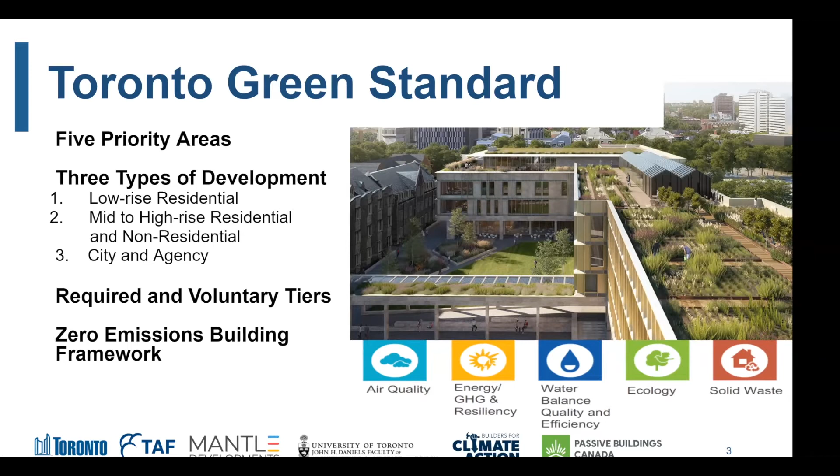The TGS includes required and voluntary tiers, and I'll explain something called our zero emissions building framework.

In 2017, 2018, we published something called our zero emissions building framework. The City of Vancouver has something similar called their zero emissions plan. What it does is set out long-term targets for the energy efficiency and emissions performance of our large Part 3 buildings, and originally that framework was set out to 2030, where we would require very low emissions level buildings.

Recently in December, our City Council bumped up that timeframe. They advanced it, asking us as part of our climate action plan to move our buildings requirements forward sooner in order to achieve what we call net zero 2040 for our citywide objectives on climate change. So instead of by 2030, by 2028 we will be requiring the highest levels of performance through our Toronto Green Standard.

So far we've been very focused on operational emissions in buildings, but now with this new emerging issue that we're all going to be talking about today, a very important issue, we have to really look at the materials components, those upfront emissions as well, and work that into our standards and process.

What we've done with the Toronto Green Standard coming into effect shortly, this Sunday, version 4, is we've introduced in a voluntary way tracking of upfront embodied emissions in building materials for both the Part 9 or Part 3 buildings. It's introduced as voluntary, but through these studies we're looking at how we might advance it as part of this framework over time to 2028.

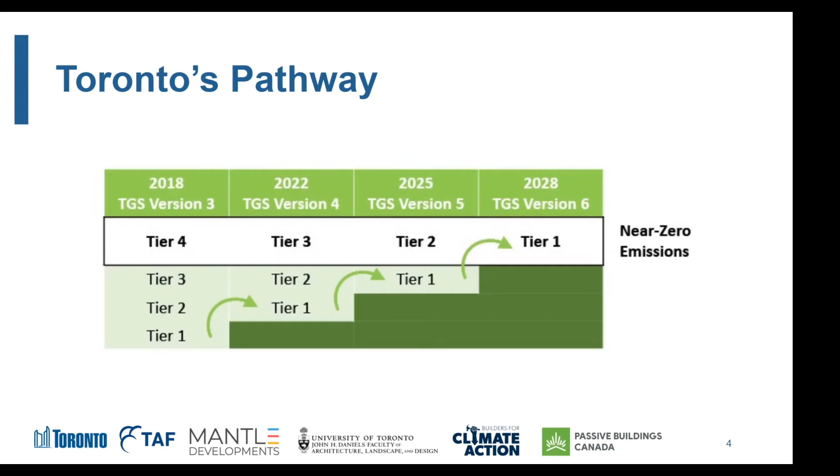This is where your input and your involvement, because you're really key stakeholders in making this happen, is very important.

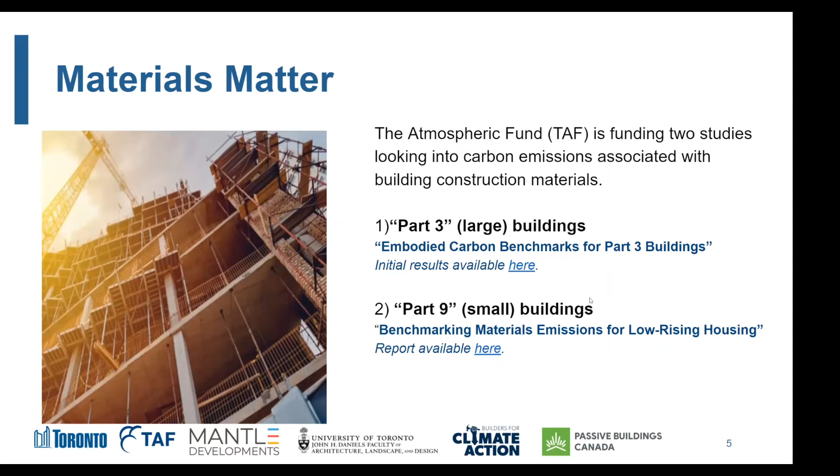As we mentioned, there are two studies going on. You'll be hearing about both of them briefly today, an update on those. What we're really looking for today is any kind of input that will inform our final deliverable on the Part 3 study. The Part 9 study has been released, but the Part 3 building study will be finished by July, producing a policy primer to the City of Toronto, making recommendations on how we manage this issue even better over time. So looking forward to your input. We may be changing the Toronto Green Standard requirements in 2025 depending on those recommendations, and may include a target coming from this study. Just to give you that context.

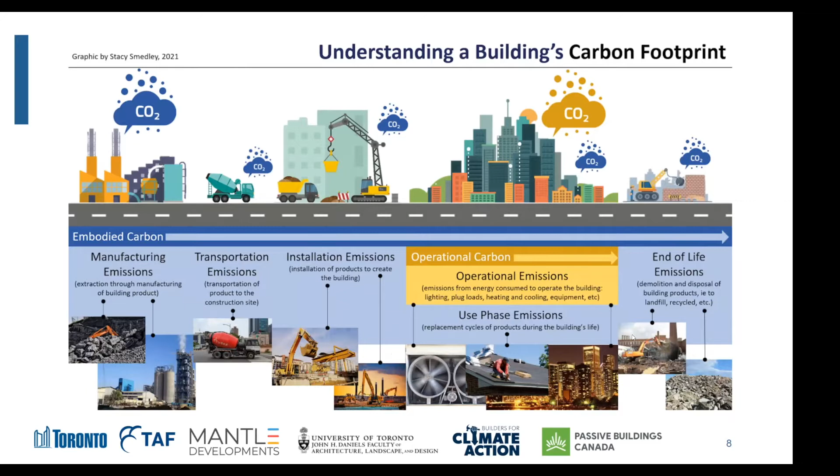Clearly, all of those processes have carbon emissions associated with them, but none of them are currently included or managed when we're talking about energy efficiency requirements or even operational carbon requirements on building annual operations.

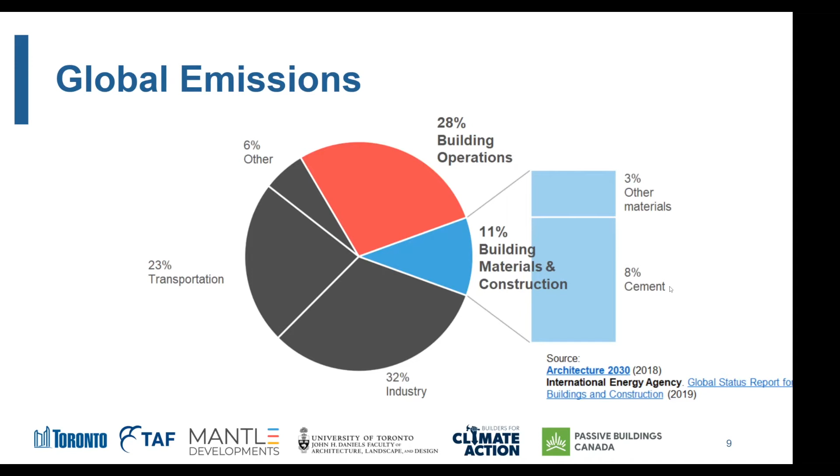But the good news is there's a lot of easy things we can do to reduce those numbers, a lot of low-hanging fruit, because these metrics haven't really been optimized until very recently. That's what this study is all about - not totally changing how manufacturers are working, but finding those easy wins and low-hanging fruit to drive down this number and start managing these embodied emissions more actively.

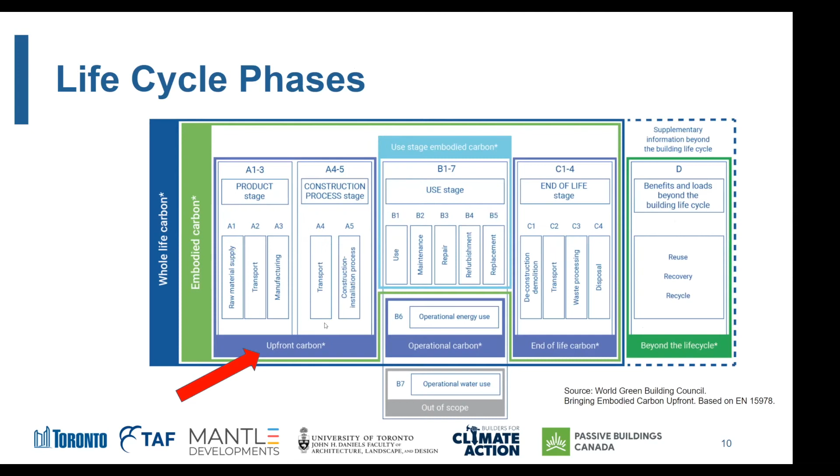We call A1 to A5 upfront carbon - this is everything that happens before the building is occupied, and this is really where we're seeing the majority of emissions in the built environment. I like to show this graphic because it shows why this is becoming such an important issue and why it's increasingly important on policymakers' agendas.

But this is really no longer the case for new construction, and there's two reasons for that. One is buildings are much more energy efficient than they used to be, because of things like the Toronto Green Standard and the Ontario Building Code.

The second reason is our energy system is much lower carbon than it used to be. Things like coal phase-out of our electricity grid, PV panels, solar panels being installed, and wind turbines being installed throughout the province have all made a unit of energy much lower carbon.

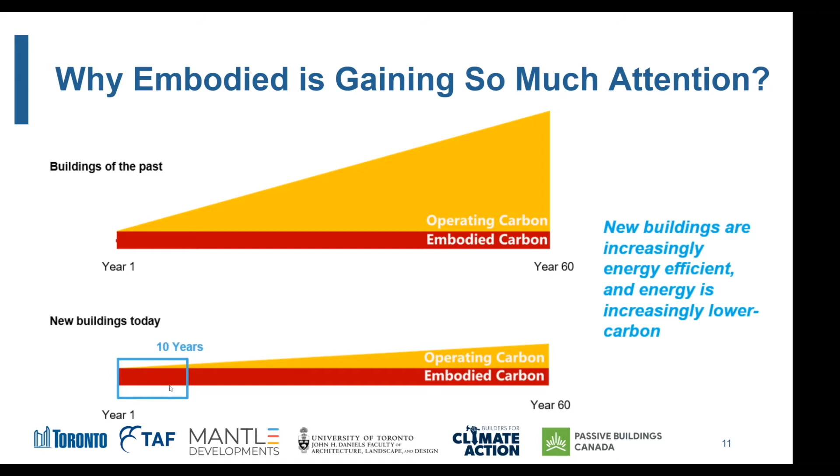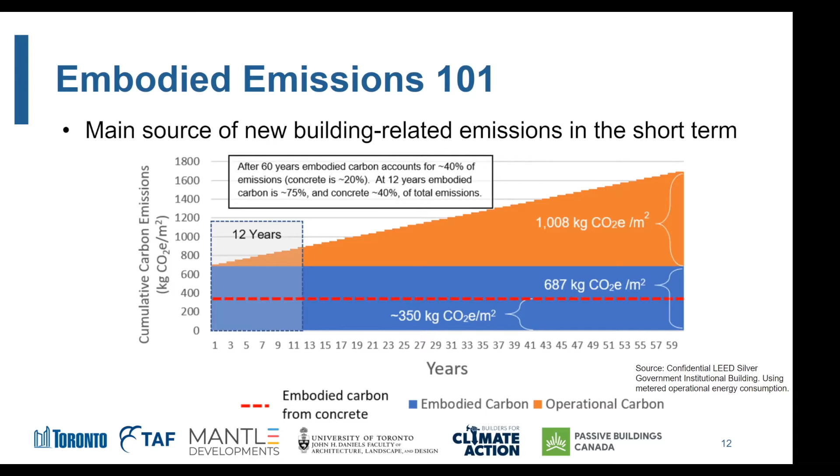So there's, as I said, a lot of low-hanging fruit. We really can pull this down quite significantly by making a few key design changes, which my colleagues will talk about later in the presentation.

So one of the first steps to address this issue is that manufacturers can start producing and providing something called an Environmental Product Declaration, or EPD. I like to describe this as basically a nutritional label, but for construction materials. It's really a disclosure document. It helps show what the environmental impact of a product is, including all of its life cycle phases from extraction to manufacture. Some EPDs can also include future phases like use and end of life, but not all of them.

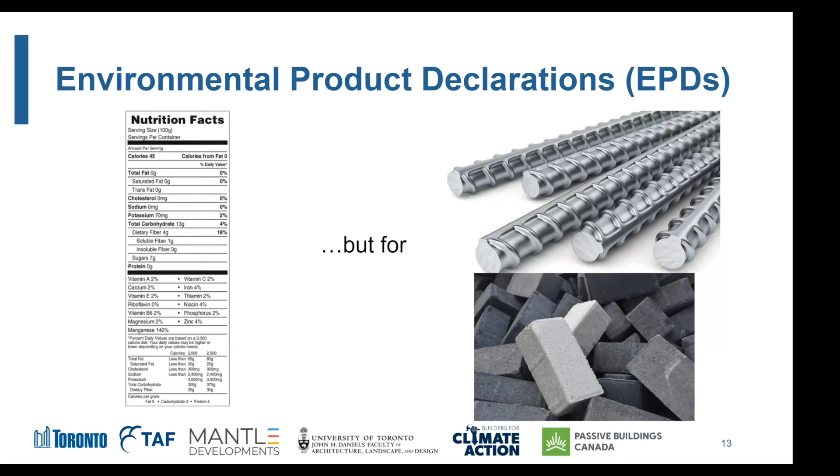On EPDs, I would say let's focus on the global warming potential, or GWP, which is the term for the carbon impact, the embodied carbon in the product.

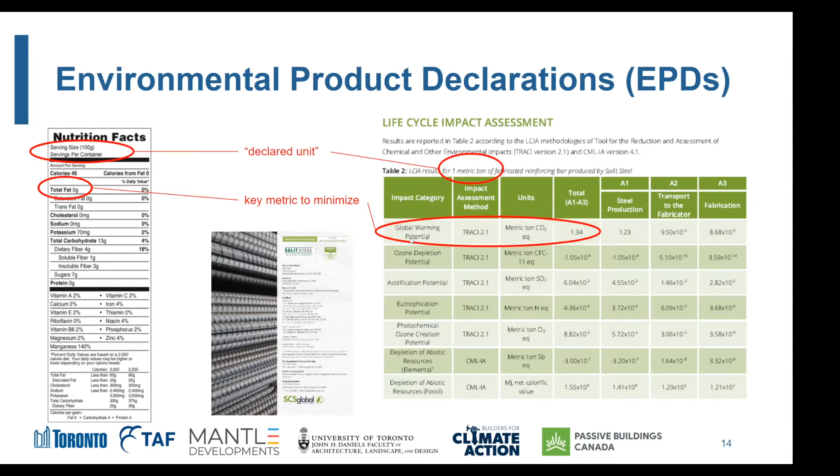But if I'm trying to calculate the carbon impact on one specific building on one of Lisa's City of Toronto projects, those industry average numbers aren't as great as I would love to see, because what I really want to know is the impact of the concrete that we're ordering on this project from the plant down the street. If we're looking at industry average EPDs, they don't quite give us that data.

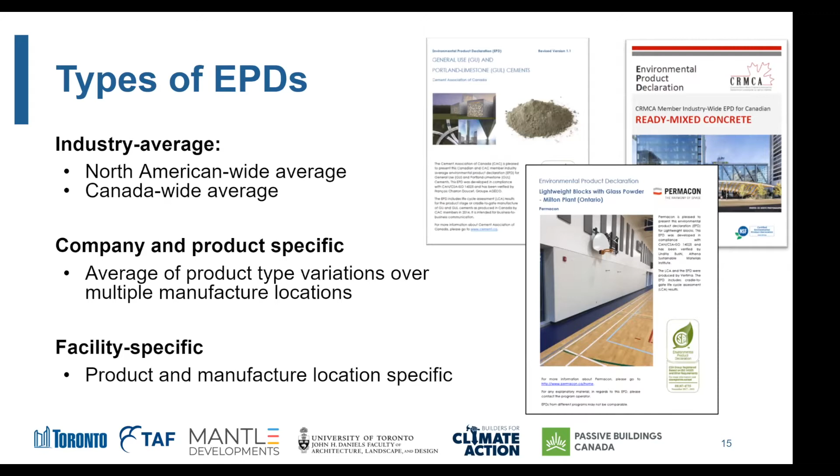Edmonton has also passed a similar requirement. The federal government has their own set of embodied carbon requirements coming into place. It needs to be disclosed for major structural materials this year. As of 2025, they're targeting a 30% reduction in embodied carbon in structural materials. And the City of Vancouver has a 40% reduction target that they're rolling out over the next few years.

Also, Waterfront Toronto has its own specific requirements that require the reporting of embodied carbon. Just to quickly say, there's a whole list of state and federal initiatives in the US, a lot of this under the term Buy Clean. You might see that in some news articles. Buy Clean is all about procurement having lower carbon materials that they're purchasing.

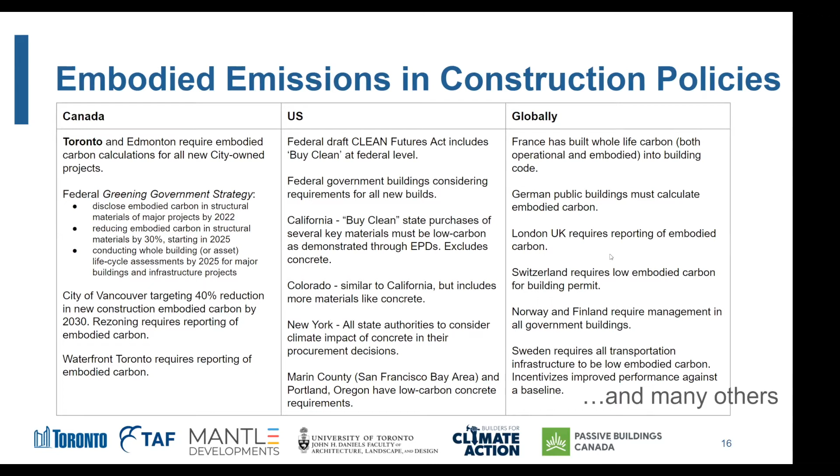So anyone who's interested to learn more about these policies, I'd recommend you reach out to me, I'd be happy to chat about any of these. But we're going to keep moving on here because I want to save time for the other speakers and discussion.

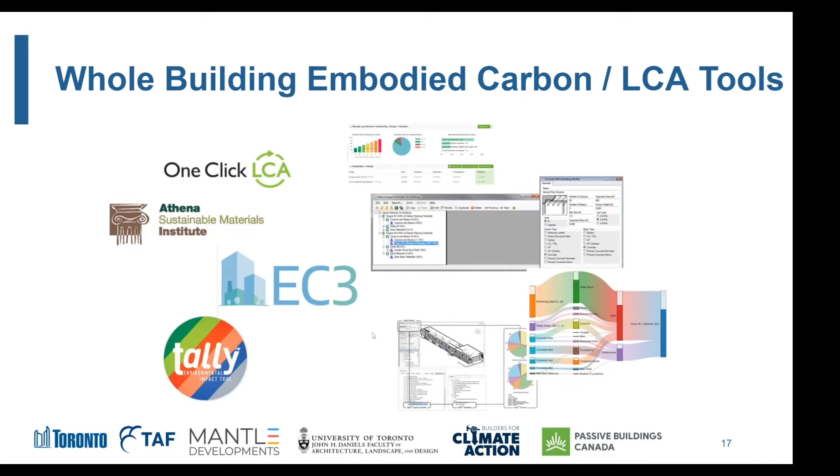Just to say, I know it's a big topic we're talking about here, but there are some really great tools that can be used to help calculate these numbers for us. On the screen, we have a bunch of them. Some of these are free to use, Canadian-based, and other ones have different functionality and can work with BIM models, or some are automated with material processes. So there's a whole range of tools we can use to help streamline this process. I'll just quickly comment that we can do these assessments at multiple times throughout a building design.

The idea isn't to do one LCA at one point of the project and then it's done, because there's really different solutions we can uncover if we do these assessments at different parts throughout the project. We're going to share these slides probably next week, but won't go into all of this in detail.

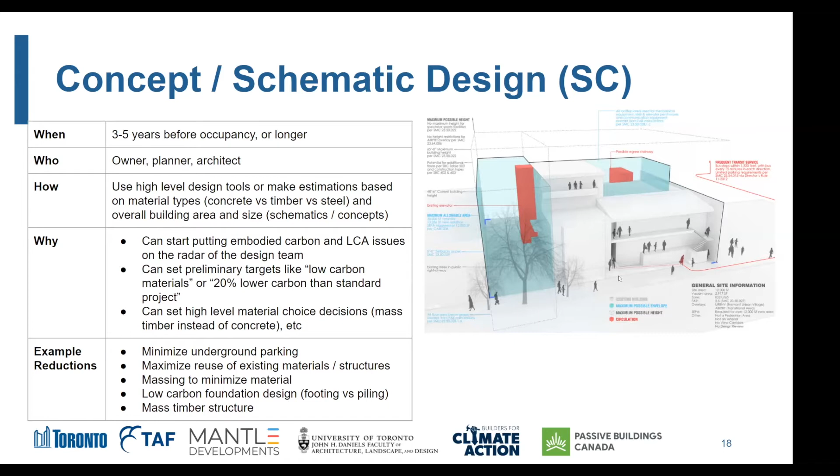Just to say, at concept design we can have a high level understanding of material type, so concrete versus steel versus mass timber, for example. At detailed design, we can have a more finer grain idea of different layout decisions, or the number of partitions we're using, and things like that we can optimize.

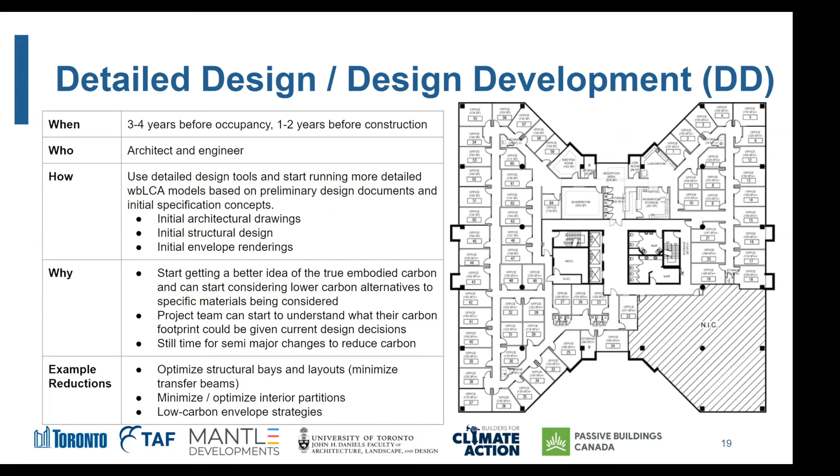If we were to use this at the procurement, tender, and construction phase, this is where we can get into more specifics about the specific material properties, so the amount of recycled content in a given material, or the location of a specific supplier. Ordering from down the street or shipping it in from China, right? Those are going to have very different carbon impacts.

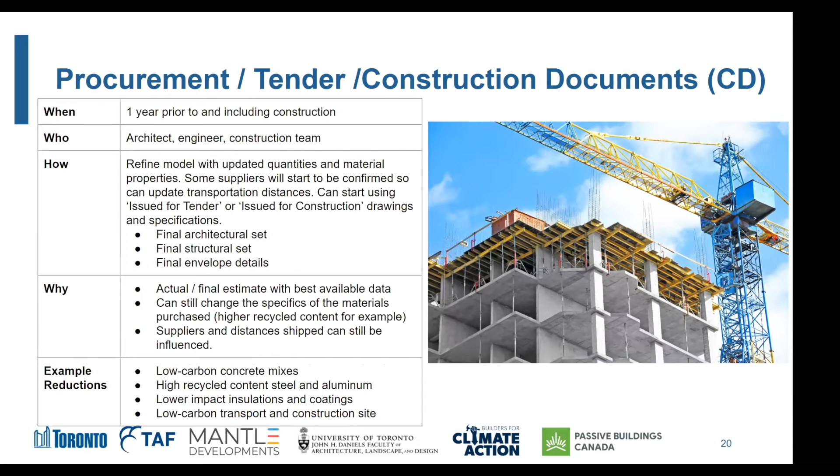So these are the kinds of things we can discover throughout the different life cycle or throughout the different design phases. And then finally, we could even do an LCA post-construction at use or occupancy, which obviously we don't really have an opportunity to make changes anymore, but this is really the final number that we know, because as you all know, there's lots of change orders that happen during construction. So we can use this as our final number and have lessons learned for future projects going forward.

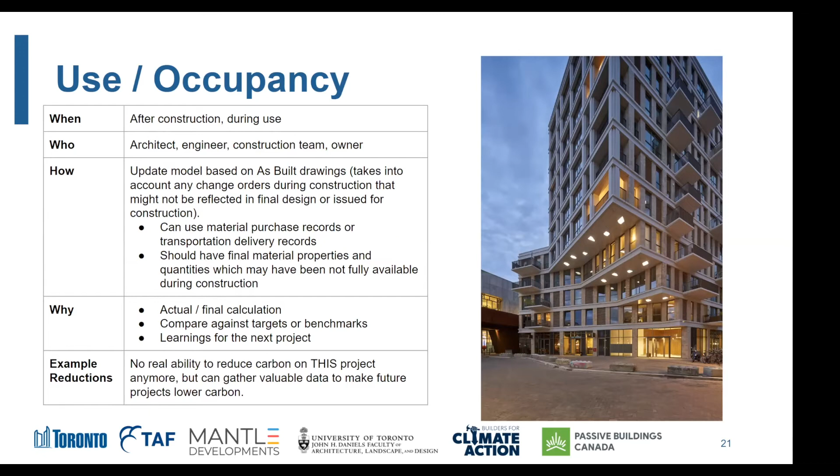Just very quickly to touch on some best practices in reducing embodied carbon. The first thing is just to ask suppliers. I guess you guys are the suppliers, but when I'm talking to owners and designers, I say ask your suppliers, is there a lower carbon option? Because a lot of you guys and girls do have lower carbon options, but the market needs to demand it.

We also found that super tall buildings have a higher carbon impact. My colleagues will talk about that a little bit. And then some of the material specific requirements, things some of you on this call are well aware of: using Portland limestone cement has a 10% less carbon impact at the same cost and same performance as normal cement. Maximizing the SCMs in our concrete mixes.

We see lots of mixes using 5-10% SCMs, but we can really go significantly higher than that, which comes with a lot of carbon reduction. And then even considering longer curing times, so not having a standard 28-day strength for concrete, but for key elements that don't require early strength, we can go to 56-day or even longer, and that can help us reduce a lot of the carbon impacts of that product.

For steel, we want to use North American steel, local steel, high recycled content. For wood, we want to make sure that it's certified, that it's from forests that are responsibly managed, not clear cut, that are being reforested.

And then finally, at the construction site, there's things we can do like using electric vehicles wherever possible for transportation, for delivery, and even construction. We're starting to see more and more construction equipment that is electric. It really makes no sense for us to be constructing in these very low emission grids and using diesel at a stationary location, right? We should be able to find a way to plug that equipment into our low emission grid and take advantage of that.

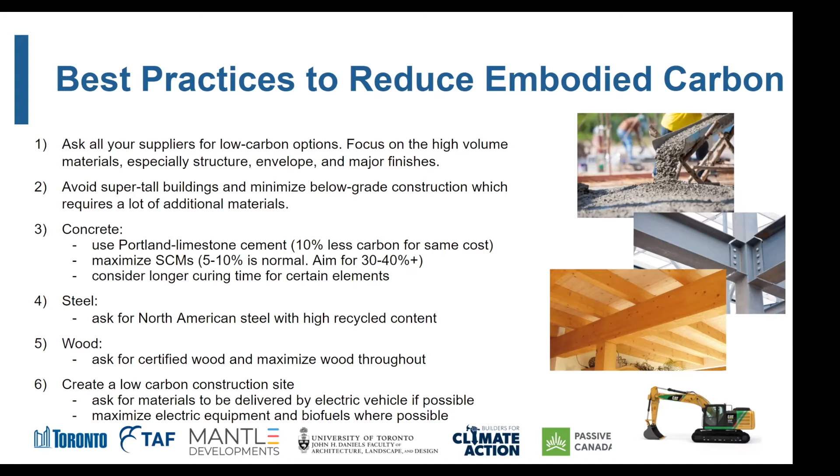And then finally, I'll just say that when we talk about LCA and these embodied carbon assessments, it's having a lot better, more complete picture of the carbon impact of our buildings, but a lot of them don't include every material in a building. They mostly focus on the structure and the envelope.

So in the LEED green rating system, they actually provide this, what to include and what not to include in your life cycle assessment. And they say specifically, do not include electrical, mechanical, controls, plumbing, elevators, excavation, site work, parking lots. So there's a whole bunch of carbon that we're still ignoring when we're doing these assessments according to LEED.

So we're trying to work with the industry to have clarity around that and maybe have a primary scope that is these kind of easier to find materials of the structure and envelope, and maybe an additional secondary scope to be more inclusive and have all of the impacts of our buildings.

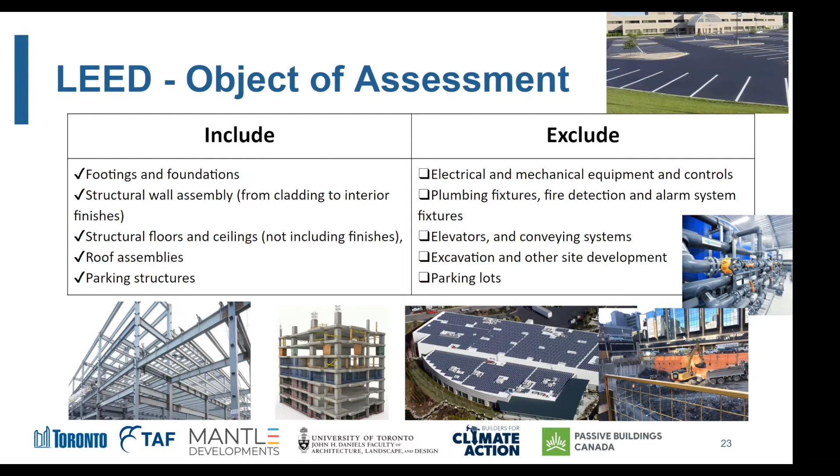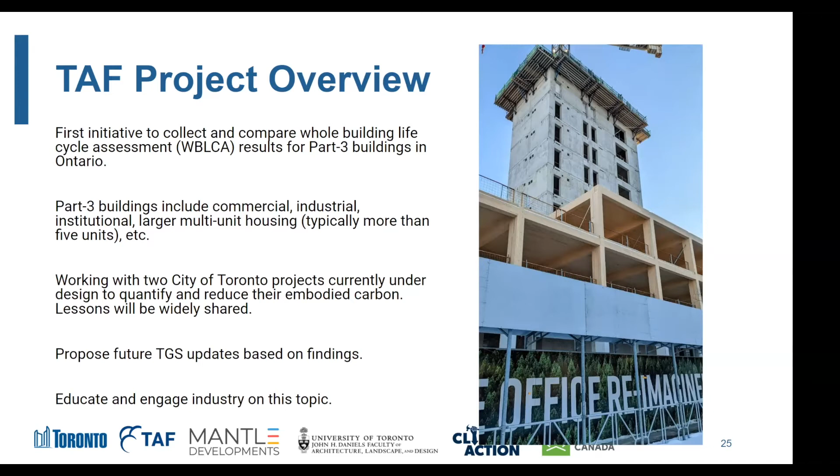So an overview of the TAF project. It's the first of its kind to collect and compare whole building life cycle assessments in the province of Ontario. We focused on Part 3 buildings, Ryan and myself, which include buildings larger than 600 square meters, across a range of types: commercial, industrial, multi-unit residential. We've been working with 2 of the city's own projects to understand potential implications of policy, and to see where reductions could happen right now within the design phase, mostly in the specification of materials, which is very pertinent to today's group. The purpose is to inform future green standards, as mentioned earlier, and to begin educating and engaging industry more broadly, given the urgency Ryan underlined.

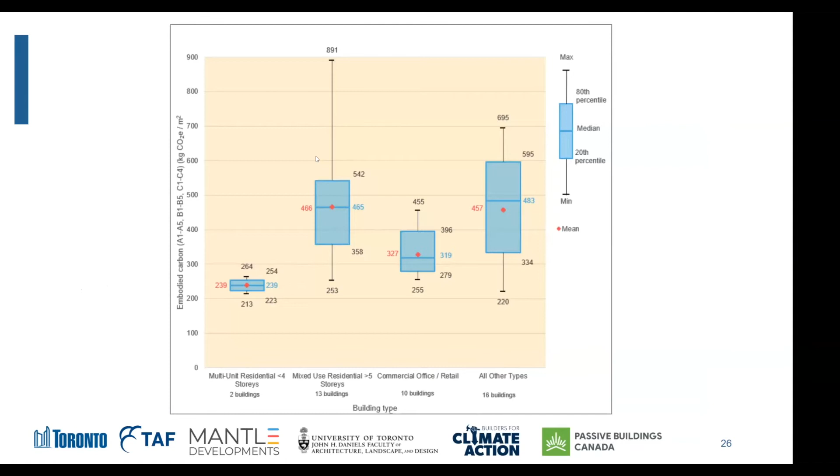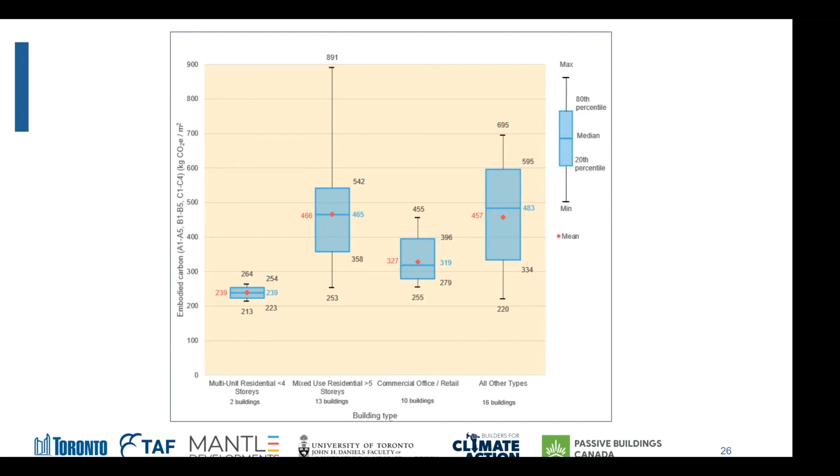Next, please. So here are the findings. We got about 41 projects responding to our call for data, which is incredibly encouraging. It tells us that life cycle assessments are happening across the province and across building types, as you can see here. The mean embodied carbon per square meter, shown in the red dots, falls below 500 in all types, and in some types there's quite a bit of range. In other types, the groupings are quite small — partly due to smaller sample size, but within multi-unit residential, for instance, that tight distribution of the 80th and 20th percentiles is encouraging and tells us we're around an industry norm here.

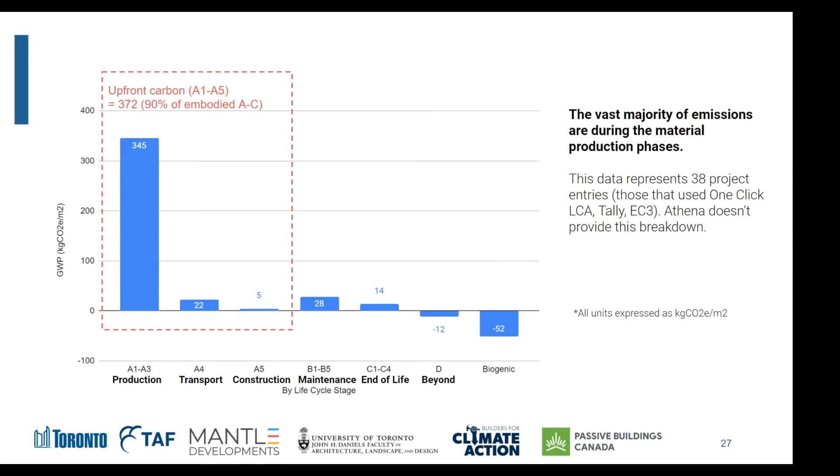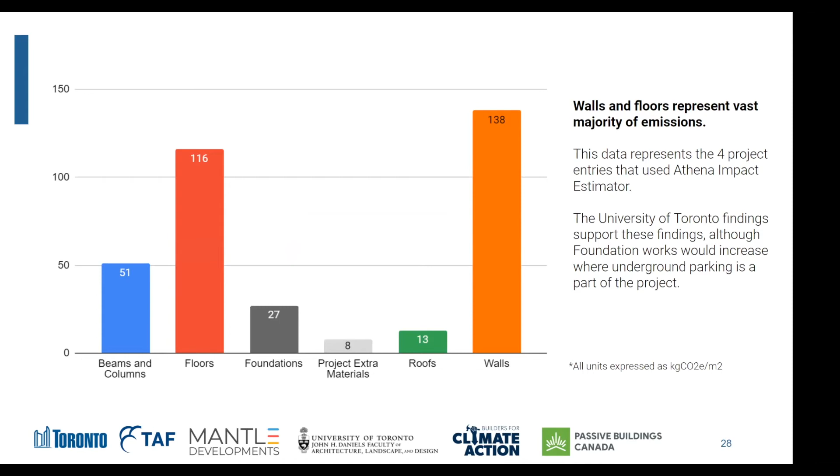Next, please. The question of why the production phase matters, and why in 8 years or less we have to make dramatic changes — you can see it's in this production phase, it's all up front. This is where emissions related to buildings exist: in how we harvest and process the materials we use to build, and where they are in a building. So much of it has to do with how we form our buildings — the materials and systems used for the superstructure, the beams, columns and floors. And then finally, the materials we use to clad our buildings, the windows and wall systems on the far right, have a huge impact on the building.

Part of this, when we looked at the city's own buildings, here's a representation of the EMS station, which was a very low per-square-meter building. We wanted to identify where to make savings, so we looked at the big items as the locations where savings could happen. Here's a representation of total emissions by part of the building's construction.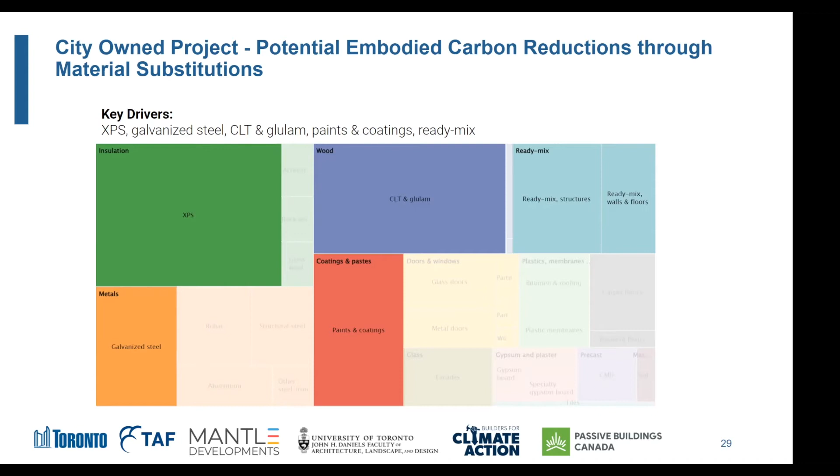Next, please. Through working with the architects, the city's project managers, and the construction and costing team, we identified 6 or 7 key places to make specification adjustments very late in the design process — switching out the type of insulation, adjusting the concrete specification, and the type of sealant on the concrete floor for this project. In doing so, we managed to shave 800 tons of emissions off this project, and we're now encouraged that the architects Diamond and Schmitt are looking to push similar assessments across all of their projects. Next, please.

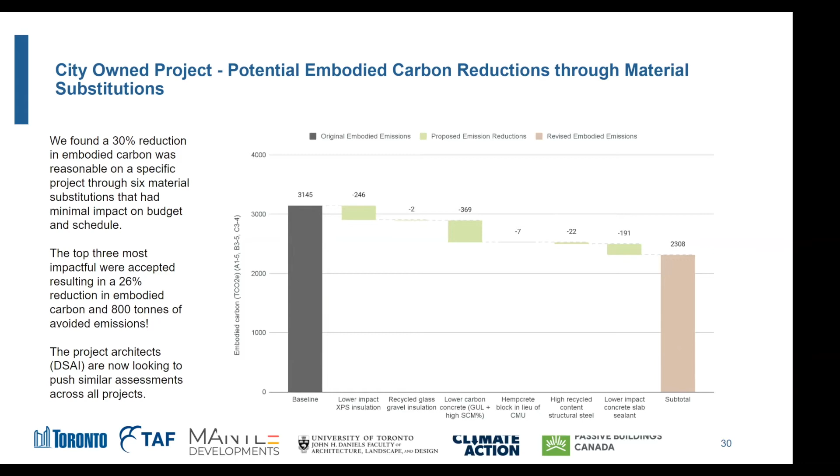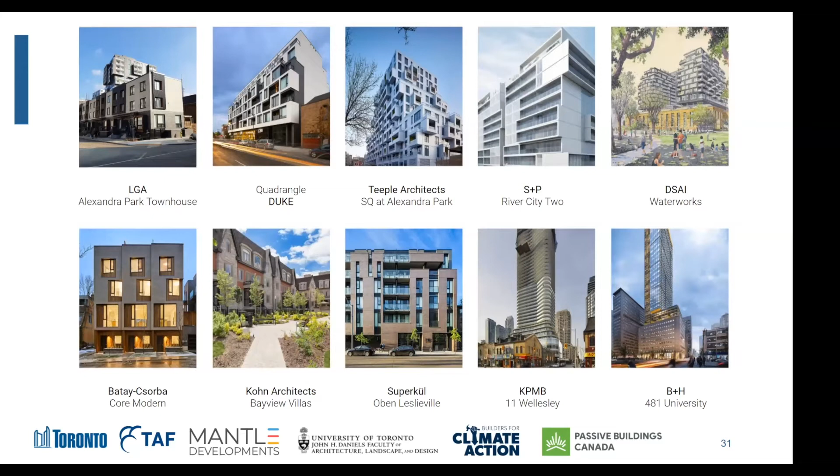Underpinning some of this work is research I've been leading at the University of Toronto at the HAF Studio, where we've been looking beyond the numbers to where they show up in a project. We've been working with architects and developers across the city. Last year, here's the 10 projects we looked at — a range of scales in multi-unit residential, all either complete or in construction in the last 5 years. Next, please. These are the results of those assessments, which feed into the slide I showed earlier, but there's a pretty big swing between types. We were interested in why that is — the low rise around 250 square meters versus mid to high rise around 500, and even within the same typology, some pretty big discrepancies. Next, please.

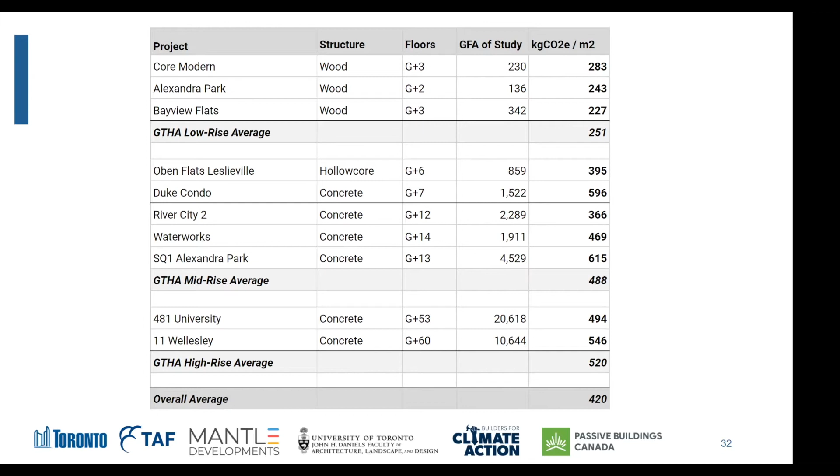So the first thing was that carbon intensive structural systems are the largest driver of emissions, and concrete, cast-in-place concrete, by and large, is the main source of emissions in the construction sector of Toronto right now. Probably no surprise to anybody.

Low-rise projects that employed wood frame structures above concrete foundations had roughly half the embodied footprint of projects that utilized reinforced concrete for their whole structure. The lowest carbon mid-rise project had a hollow core structure, a steel and hollow core, that reduced the volume of that project.

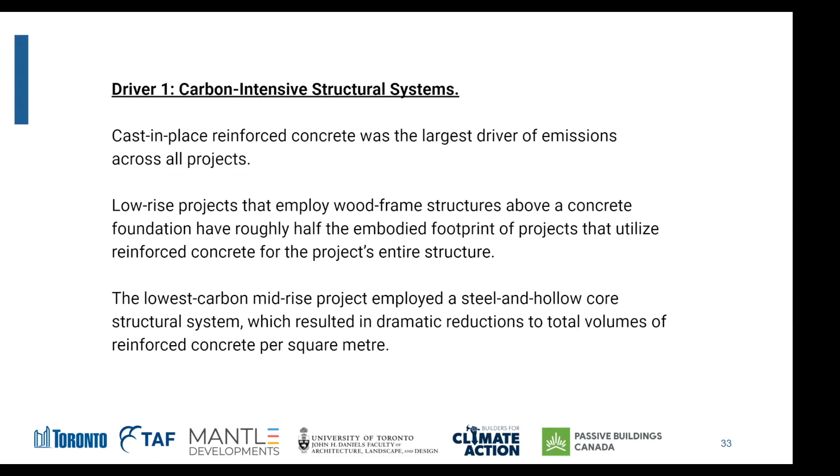Next, please. Here's a representation of the material, the radius representative of total emissions, and the pies telling you where those emissions live. As you see, concrete dominates the overall emissions profile, but right next to it is aluminum. Next, please. And that aluminum is really in our envelopes.

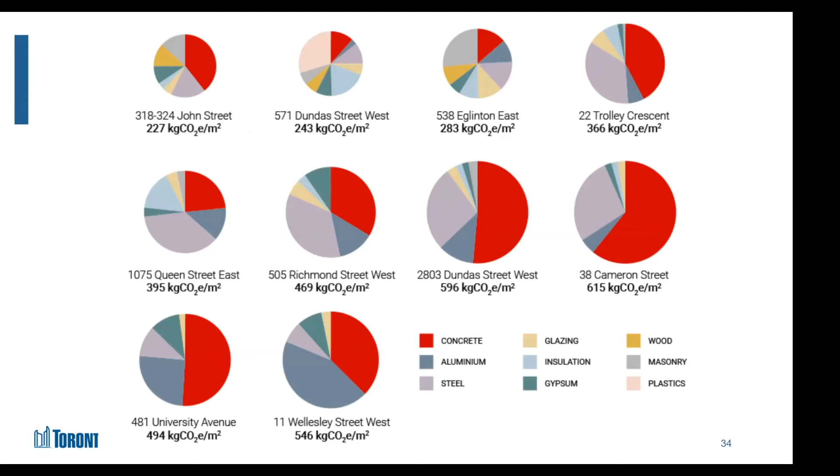I think that the way we're currently building the walls of multi-unit residentials, certainly the mid and high-rise projects, they use a lot of aluminum, and they also utilize a lot of foams, specifically XPS insulation historically. These two products and material classes have extremely high global warming potential. XPS, in the case of the blowing agents associated with its making—though those have been banned and reduced—it's still a highly emissive material.

And aluminum, as you can imagine, we're sourcing it from all over the world. The smelting and processing of it is incredibly energy intensive and results in high embodied emissions.

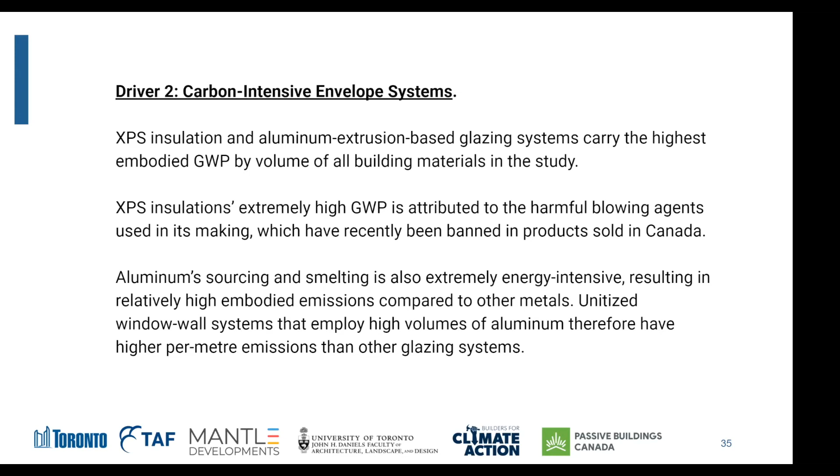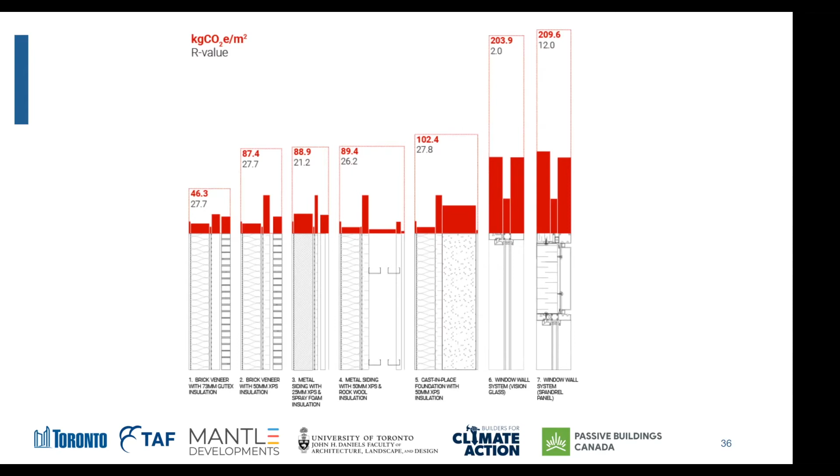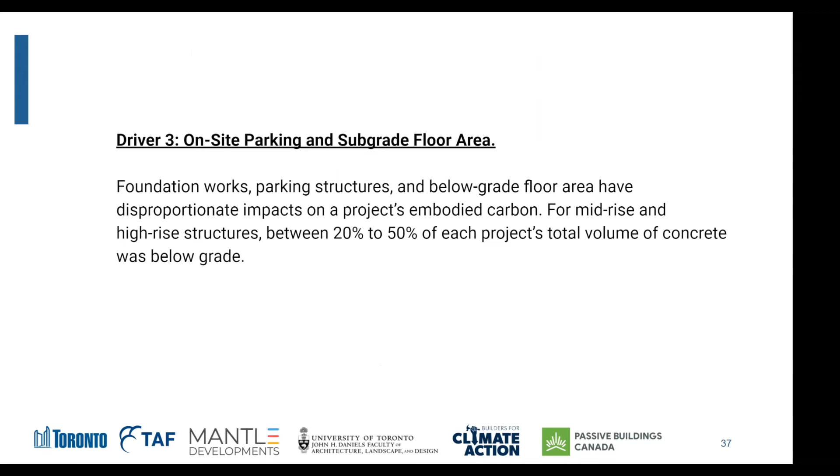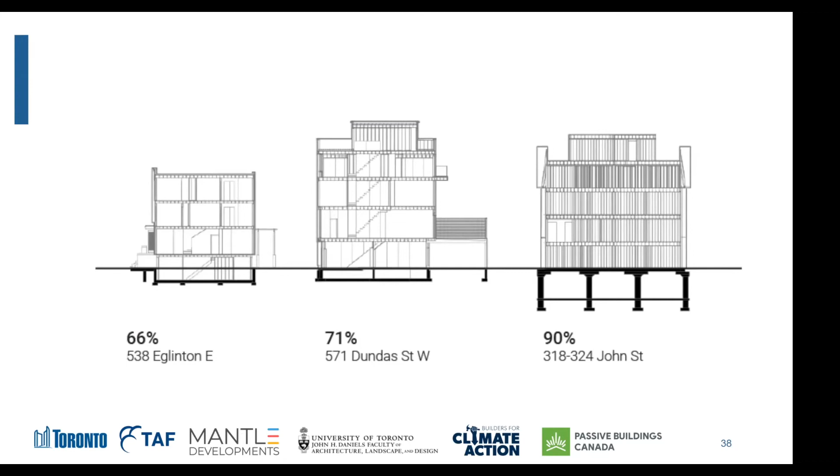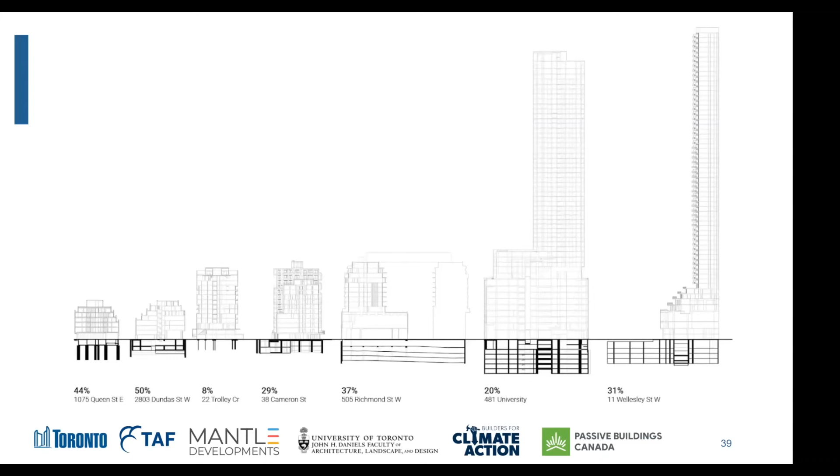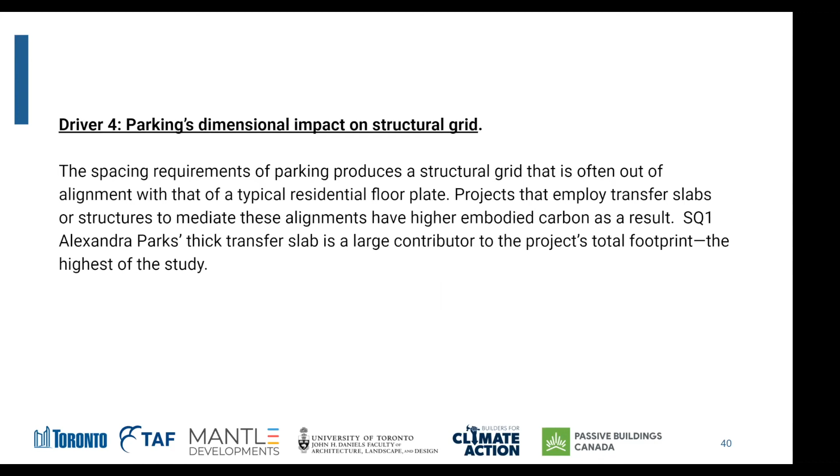Next, please. Also, the parking's dimensional impacts affect the structural grid of a project. The spacing of a parking space is not the same as a kitchen or a living room, and when you stack these things on top of each other, they result in really large transfer slabs.

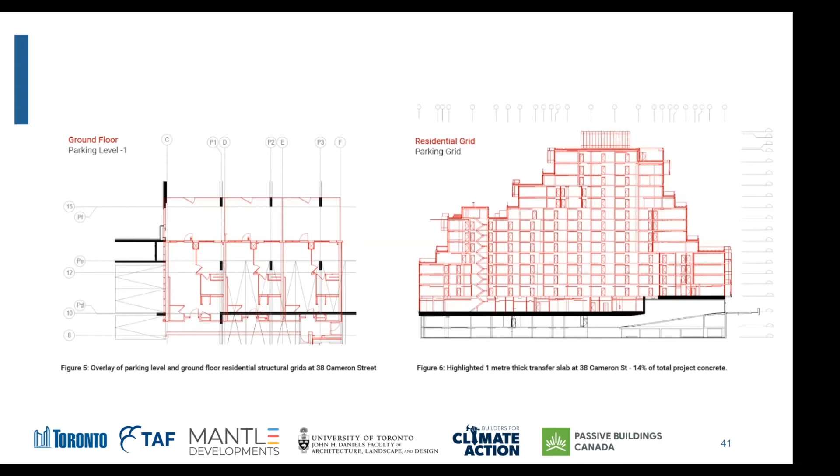So right now we're drafting the recommendations and a policy primer. As you can see from the beginning, we're at the 2nd of 4 workshops here. We'll be working with taking the feedback from these workshops and putting that into a primer document, to then lead to a final workshop with recommendations on how to incorporate this into the next version of the green standards. Thank you.

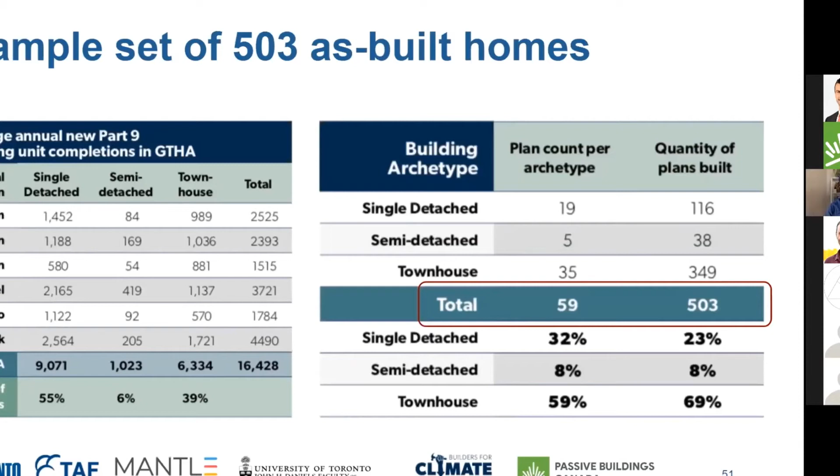So just to, Ryan talked about scope and so did Kelly, but for this study, we used a tool called BEAM, which we developed in-house at Builders for Climate Action. And it's giving us results for what we call the material carbon emissions, that upfront part that has to do with manufacturing the building materials. So we are not looking at transportation to site or installation, because we know that that's not where the big chunk of the emissions live.

We're also looking at basically the structural enclosure and partition materials. So things that aren't included are things like site work, stairs, mechanical, electrical, and plumbing equipment, surface finishes, appliances, all of that kind of stuff is not included. So we figure, looking at some studies where all of those things are wrapped in, that we're accounting for maybe 50 to 60% of all the embodied carbon in the houses we're looking at.

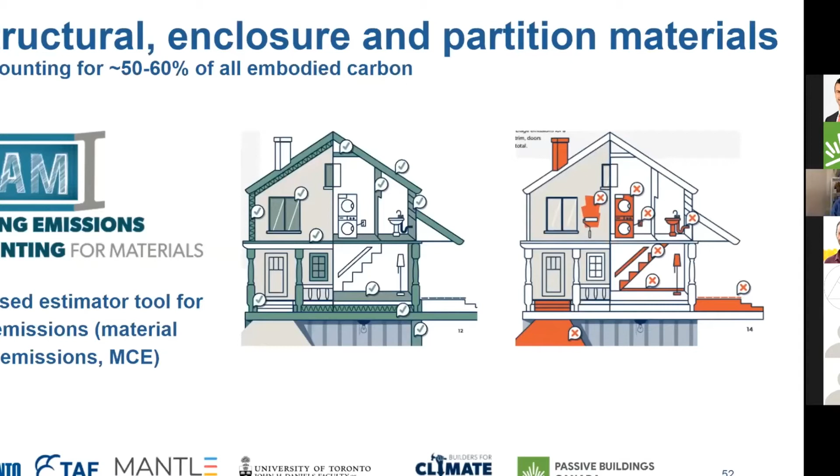But we focused on this range of materials for a couple reasons. One is it's the set of materials where we have the best data set. We can represent all of the materials in a really good way, whereas lots of the ones we left out, there just isn't very good data for them. We also feel that these are the materials where a lot of action can be taken by somebody to reduce those emissions. The only way you're going to reduce your mechanical, electrical and plumbing emissions is to plumb less or wire less, and that doesn't seem like a change we'd be driving with this study. But you can think about your structural materials, your insulation, your windows - really big reductions can be achieved in those material sets.

So we'll go to the next one.

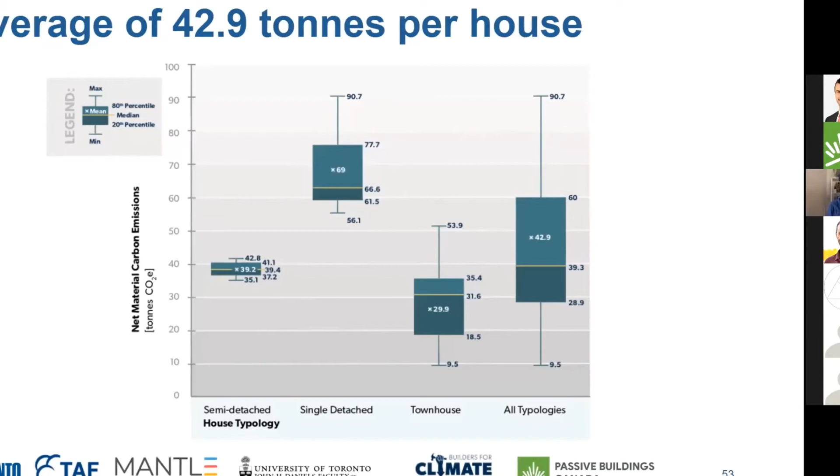So this is the plot for what the emissions across this whole study looked like. We looked at 3 different typologies: semi-detached, single-detached, and townhouses. You can see those first 3 boxes on the left. The single-detached houses in general had a higher carbon footprint because they're bigger and because the entire enclosure of the building is being attributed to that one residence. You can see that semi-detached is a little bit less overall, and the townhouse is less again. So that's interesting from a planning perspective - if we want to drive overall emissions down, thinking about grouping houses, townhouses are a good way to go. But essentially, we're looking at just under 43 tons of emissions per house for the structural enclosure and partition materials.

However, we didn't want to just use the lens of overall emissions because the size of the units matters. So if we look at emissions per floor area, you can see that the results really tighten up. On the left, that's the total floor area, so that would be taking in garages and any unheated space in the house, unfinished basement areas and things like that. You can see that suddenly the results really tighten up because we're attributing emissions to the size of the building. Obviously, if you make a tiny house, it can have a lot less emissions than a really big house just by the volume of materials. So by looking at it by floor area, you can see that these Part 9 buildings fall within a pretty tight range.

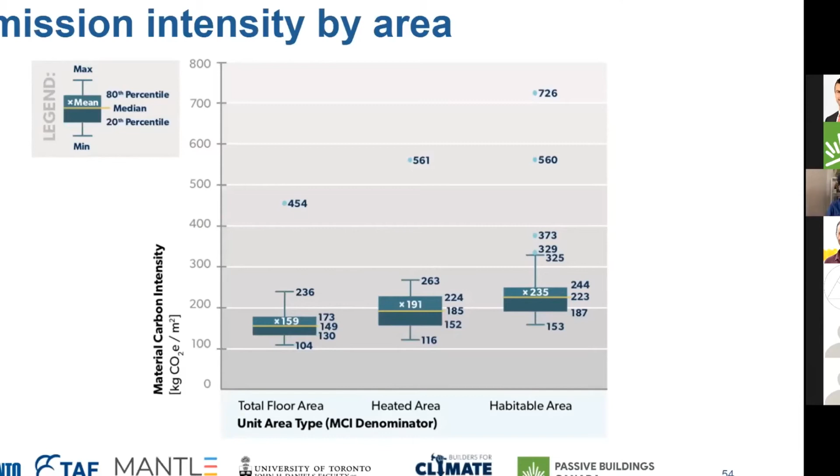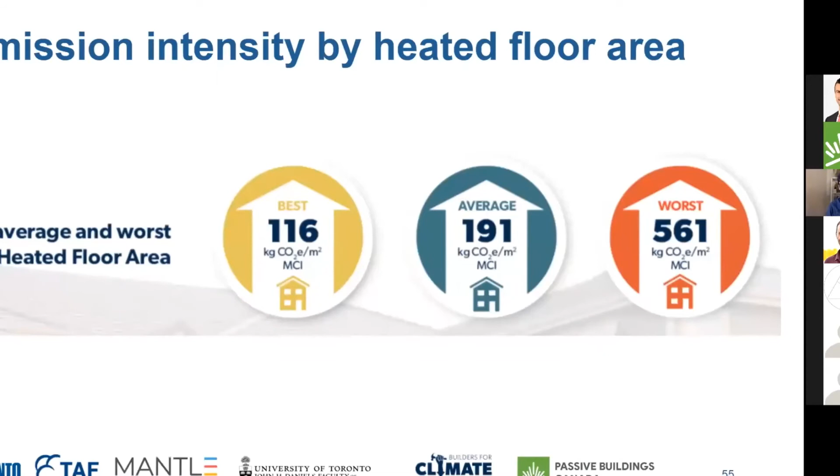So this just sums that up for the heated floor area. The carbon intensity ranged from a best case of 116 kilograms per square meter of heated floor area. The highest example in the study was 561 kilograms per square meter, and the average landed at just over 191 per square meter. So you can see that there's a pretty wide range there, but a lot of the buildings were clustered really closely around that average result.

We were also able to look at the impact of different material categories, and very similar to what the Part 3 study found, we found that just 3 material categories - concrete, insulation, and cladding - accounted for 72% of the total material emissions. So if we're going to really try to make a difference here, these are the areas where we want to concentrate.

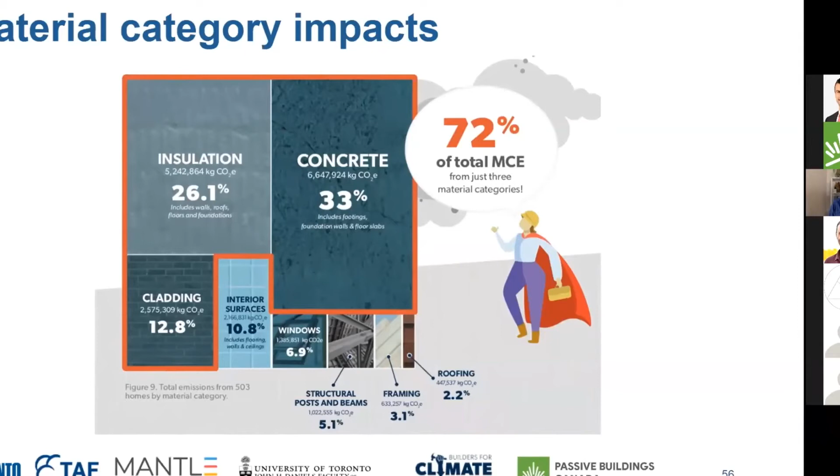Things like roofing, framing, post and beams, windows, all of that stuff - there are certainly savings to be made there, but the lion's share belongs in just those 3 categories. So that's where we'd recommend we pay attention in the low-rise market, is making reductions there. Also along the lines of the Part 3 study, we took a couple of the buildings from the study and looked at making some material changes. Same kind of parameters as with the other study - we wanted to look at achievable, affordable, code-compliant type substitutions that could be made. So we started with a building that had 81 tons of emissions, or 262 kilograms per square meter.

We did things like use a lower carbon concrete mix, then substituted cellulose insulation in place of the other insulations that had been used in that building. Took the XPS foam wrap around the building and substituted wood fiberboard, changed the brick cladding for engineered wood cladding, and took a bunch of the other categories like flooring and drywall and didn't change the material, but just changed to the best available product - the one with the lowest emissions in those categories. And you can see it's pretty remarkable that that brought about a 75% reduction in those emissions. So we went from 262 kilograms per square meter down to 66 with just a small handful of substitutions, all of which are doable and achievable today.

And then the next one - this stood out to me as being really interesting. This is an overlay on the graph you just saw. So you can see now we're looking at one of the houses that had the lowest carbon footprint to begin with - that little orange box on the left started with only 33 tons of emissions associated with it. We applied all the same substitutions, and we ended up at 56.5 kilograms per square meter. The previous house landed at 66 kilograms per square meter. And we saw this over and over when we made substitutions - it didn't have to do with the design of the home or the location or the typology. If you chose the best available materials, you could get all the houses into that sort of 50 to 75 kilograms per square meter range. So really interesting to see just how much savings is available to us in emissions in this low-rise sector.

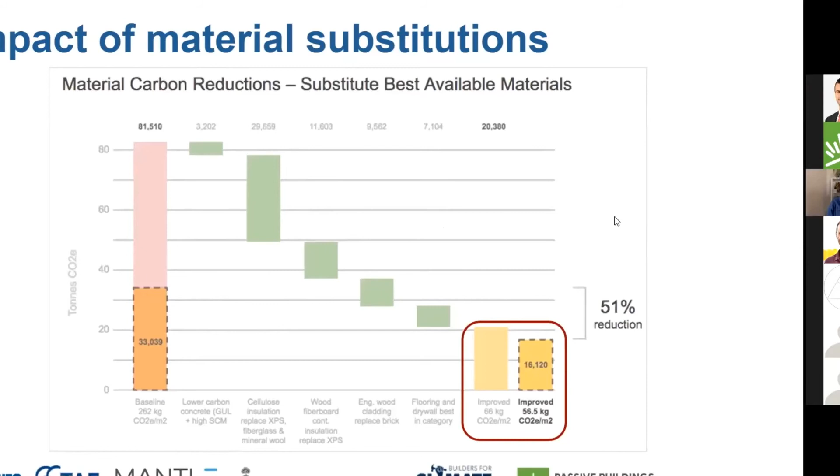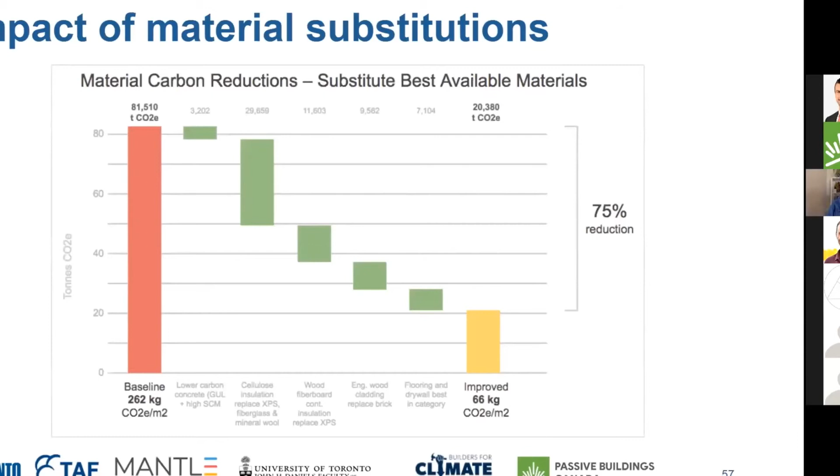Yeah, at no cost or very negligible cost. In some cases the material we're substituting is actually cheaper than the one it was replacing - in fact, in a couple of the main categories, that's true. In this case, the lower carbon concrete doesn't have a cost penalty. Moving to cellulose insulation looked cheaper. The wood fiberboard is more expensive than the XPS. The engineered wood cladding was cheaper than the brick. And in the flooring and drywall categories, it was just a brand choice - so negligible cost there. So in general, you could achieve that suite of changes at or about the same cost. It might be a little more, a little less, or on par, but there's really not a heavy price penalty to be paid here. And I think if you do this smartly, there could be no price penalty, and in fact the house could be cheaper. Thanks for directing that one, Kelly.

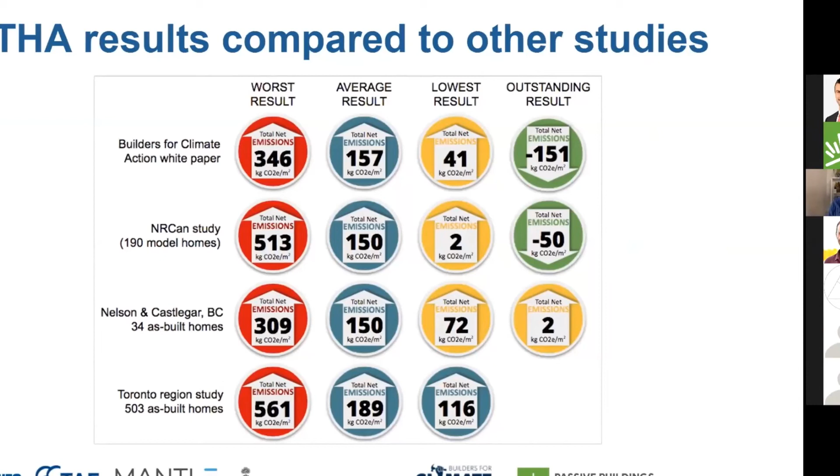This is where I want to bring up the cost issue, because one of the things that really stands out from both the Nelson study and the GTHA study is that none of the builders who submitted plans were intentionally building to have a lower carbon footprint. They're just sending us the plans they're currently building. This fits their business model - it's what they build, it's what they sell, it's how they make their living.

It's interesting that there was a whole cluster of homes in the GTHA study that came in around 116 to 120 kilograms per square meter. That builder wasn't intending to make a low carbon home, but they're beating the average by 40%, which means somebody's business as usual is already 40% less than the average. Compared to the higher results, it's a huge achievement. So even if we just get everybody doing what this builder is already doing, that's a 40% reduction. We don't get easy 40% reductions in climate change very often, but this points to that being possible. The same thing happened in Nelson.

There's again a builder just building the house they always build, beating the average by 50%. It tells us there's a lot of room, and that we don't have to go very far out of anybody's comfort zone initially to see 40 to 50% reductions in this building space.

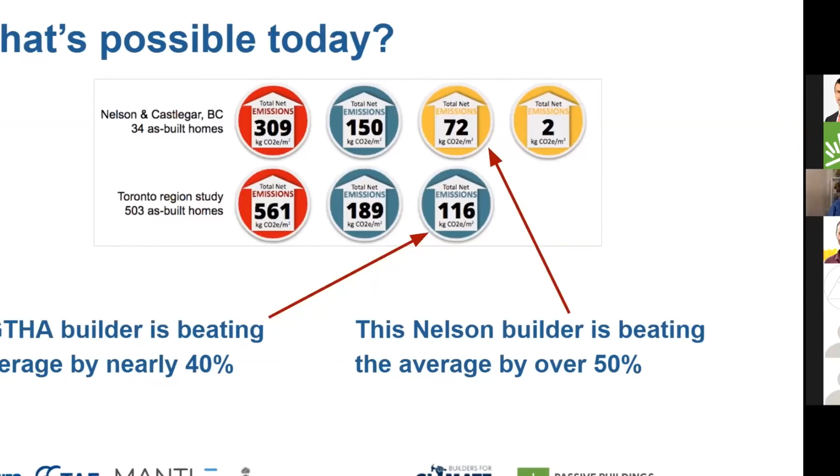I definitely invite you to download both of these reports - there's a lot more in them than we can cover in these 10-minute sessions. For the final recommendations of the Part 9 study, we recommended that all new home designs do this kind of calculation at an early design phase, and that municipalities ask for that report in the permit phase.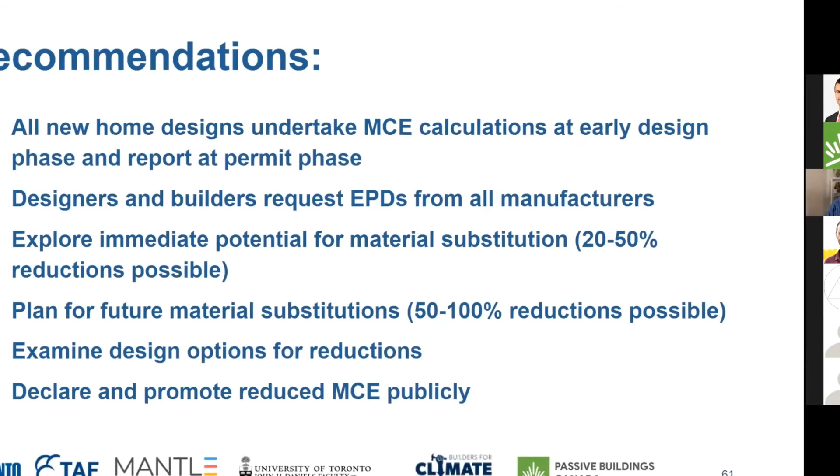Everybody on this call - designers and builders - should request EPDs from all the manufacturers. I noticed some notes in the chat asking if there are enough EPDs, or saying they couldn't find product-specific EPDs. I think I've seen the number of EPDs really explode in the last couple of years, because people are demanding them. The more we demand them, the more complete the data set we'll get, and the better we'll be able to...

Specify the products that meet our... one omelet, please. Yep, should I warm up for you? Somebody's ordering lunch, not on mute. If you could mute, that would be great. Thanks.

To explore these immediate potentials for material substitutions that I mentioned - and the report goes into a lot more depth, showing we can easily see a 20 to 50% reduction from business as usual in a simple and cost-effective way. The report also looks at what materials could move us even further. Some things that are kind of coming, or not as common in this market but used elsewhere, can get us between 50 and 100% reductions. So start looking at that now, start thinking about it, start planning for it now.

Our study didn't look at design options for achieving reductions, but as Kelly mentioned with the large building study, if about 35% of the carbon footprint of these homes was in the basement concrete, one simple strategy we didn't explore here - since we used as-built plans - is thinking about the actual design of the building as a way to reduce the carbon footprint further.

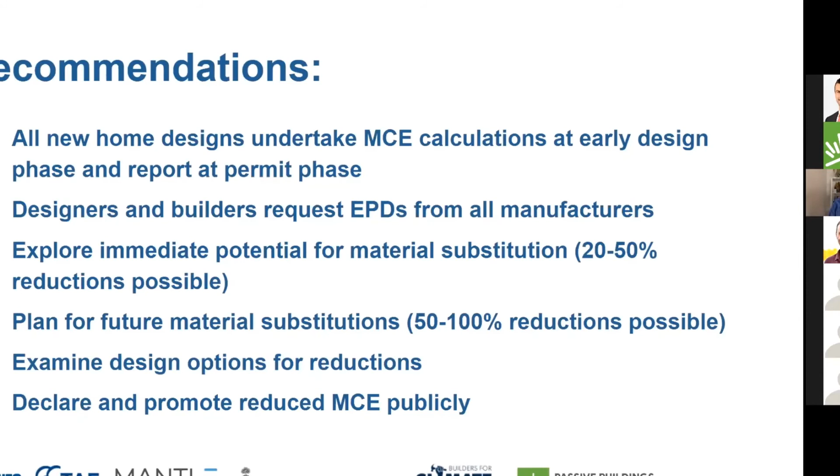Finally, we'd encourage residential builders to start declaring the carbon footprint of their homes, pushing to get really great results, and then using that. Surveys show again and again that 60 to 80% of Canadians are very concerned about climate and want to make climate-smart, climate-friendly choices. Offering homes that show they're 40, 50, 60% less carbon footprint than a competitor's is going to be a real advantage. So make these results part of the discussion around building and buying homes.